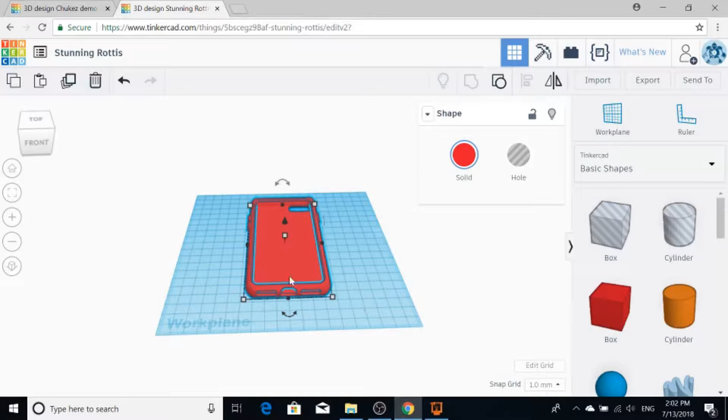All right, you guys, so here's the demo. This is the case that I designed on Tinkercad, as you can see. I wanted to go ahead and show you the logo, which I ended up using for my phone case.

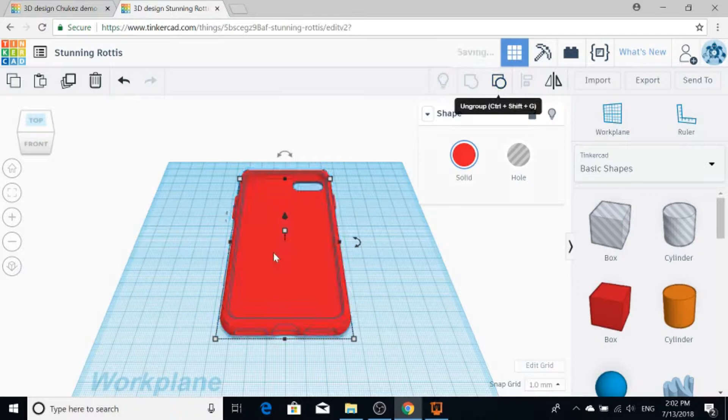Now, I'm going to kind of go through a little bit of how I designed it. Keep in mind, I did get the specs for the iPhone from the Apple website. I did have to make the cavity a little bit larger in order to fit the phone.

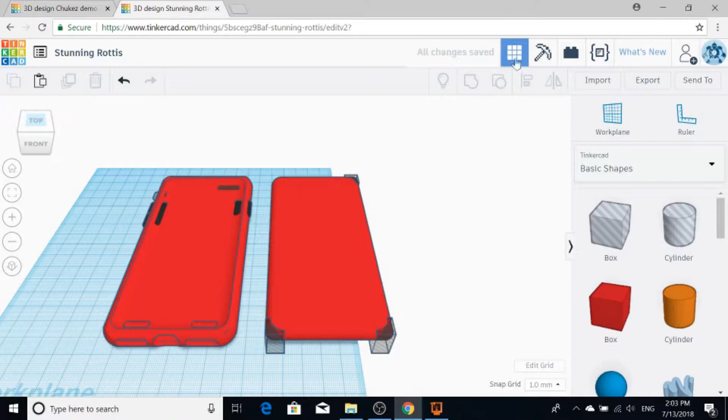And with Tinkercad, you're allowed to create a radius for your shapes, like the cube here that I'm using as the initial shape. But the radius was too sharp at the corners. So what I ended up having to do was create this here to create the proper radius.

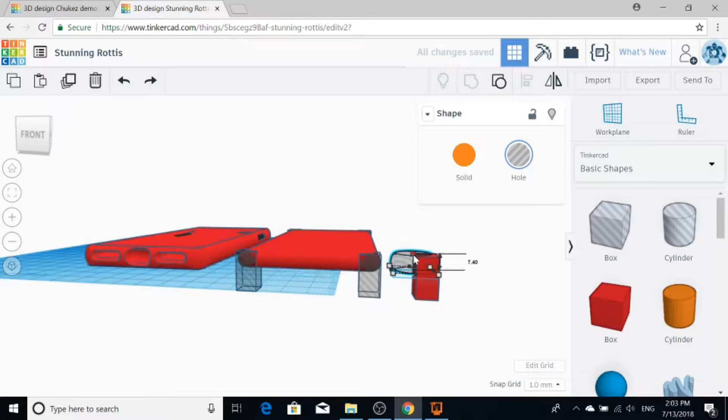So essentially, I took a cube, added a kind of a filled donut disc with the proper height here that'll actually allow me to fit the phone. And then took that as a negative out of the corner there, created, again, a hole negative, and placed those on each one of the four corners of the cube.

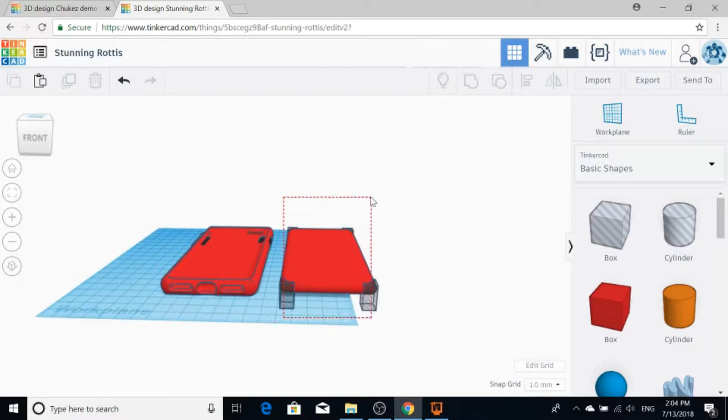Now, once I combined those five shapes, I went ahead and created the negative, centered that into essentially a bigger solid version of the same shape in order to get the shape of the phone case. As you can kind of see here, I'm kind of having to mess with it a little bit and make sure I get everything lined up properly.

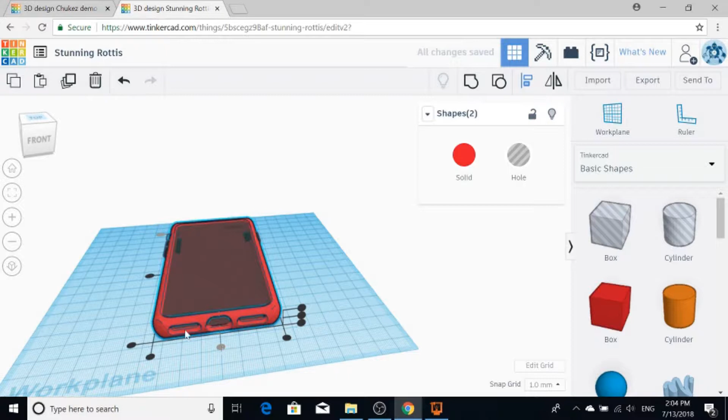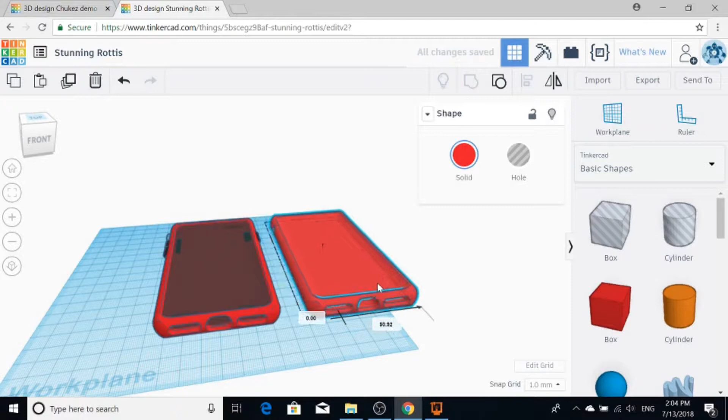So what I'm doing here is I'm just trying to show you essentially that I use the same shape. Now you can kind of see here on the top there, I used a different cube in order to create the hole in the case for the face of the phone to fit through.

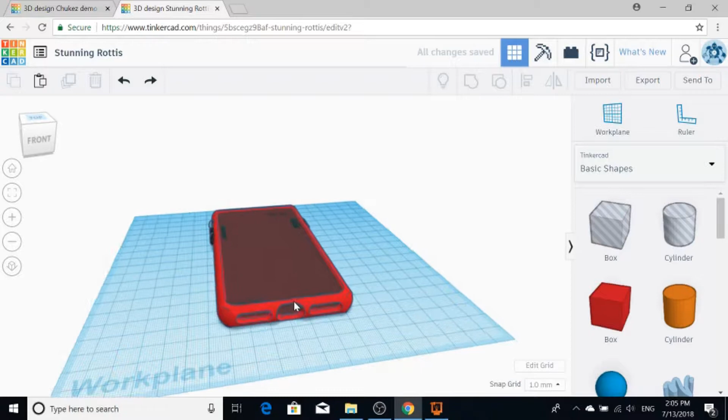Now what you'll see here is that I've got the holes lined up for the speakers on the left and right hand side here. In the center, that's the charging port, so I made that one a little bit larger and made sure it was going to fit.

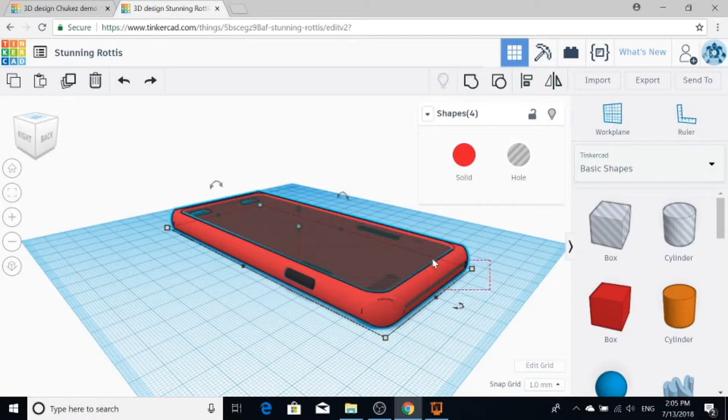Now, what I did in order to get all the buttons and holes lined up properly is I took the dimension sketch from the Apple website and took that into Adobe Illustrator, created an STL file that I was able to import, and then I kind of used that as a guide for where the buttons were going to be, where the charger hole was going to be, all of that kind of stuff.

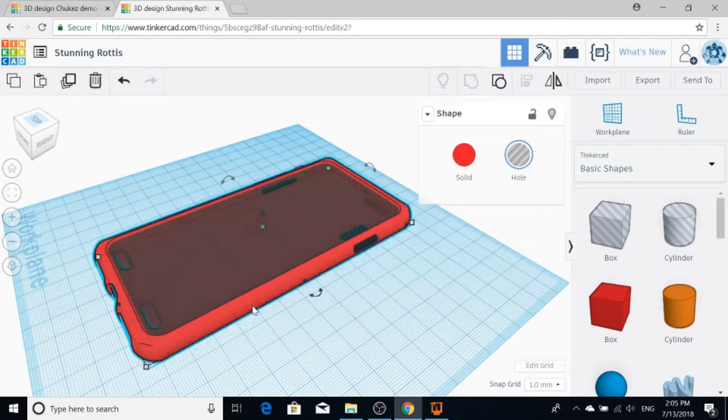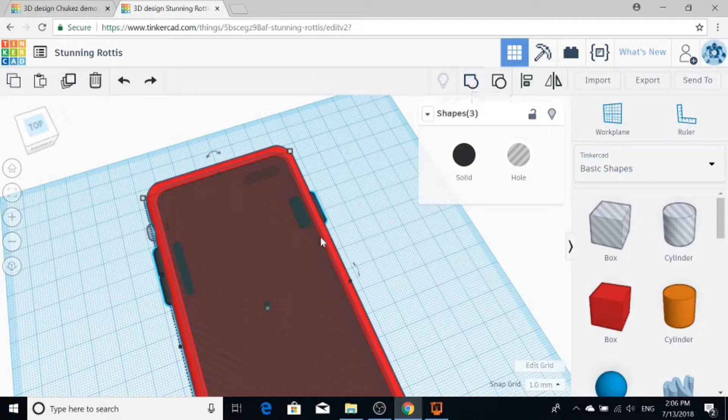Now, kind of what I'm trying to show here is how I grouped everything together. You can kind of see that these buttons that I added to the case are in the right spot, but in order to get them to function properly, what I had to do was group the negative space, the exterior phone case, and the buttons all together, right? Now I'm just keeping it red here just so that it's easier to decipher and everything kind of stays uniform.

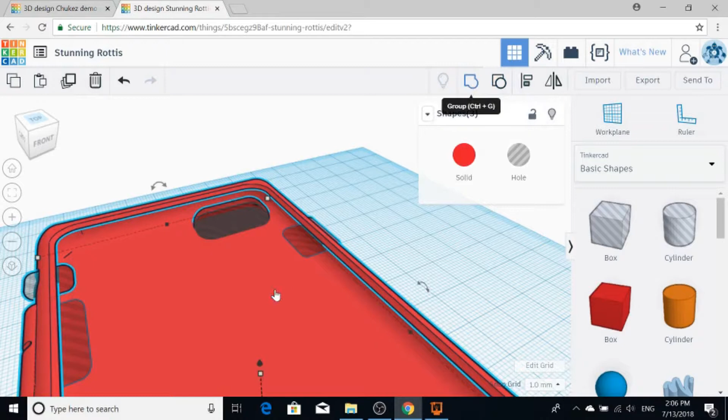Now, you can see here that I have these negative spaces for the camera hole as well as under the buttons here. All right, so what I'm trying to do is take this negative space. I'm going to go ahead and add in the camera hole here as well. But these two negative spaces and combine those with the exterior case. So that gives me a little bit of a gap so the buttons will fit properly.

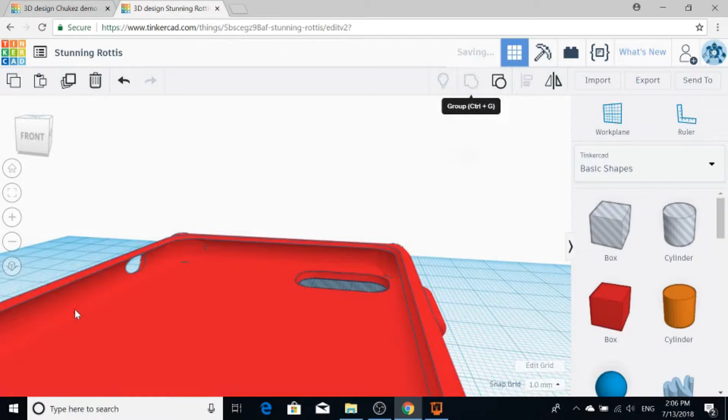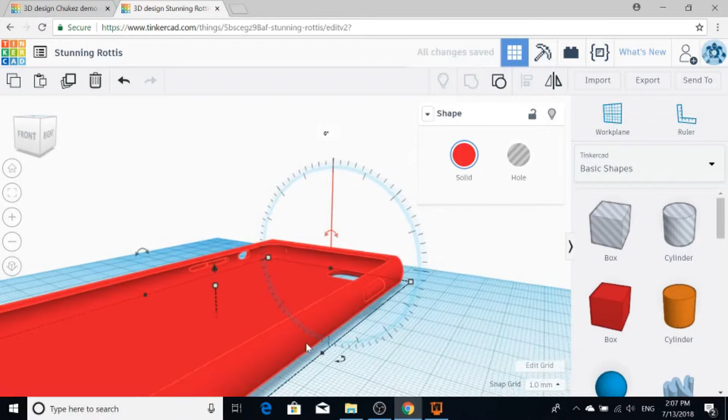Now, what you'll see here is within that, there's a small solid cube kind of shape that I used in order to be able to actually use the buttons so that it would function properly. So I went ahead and grouped everything together, right? At this point, I'm just adding the logo to it. And again, the logo is in negative.

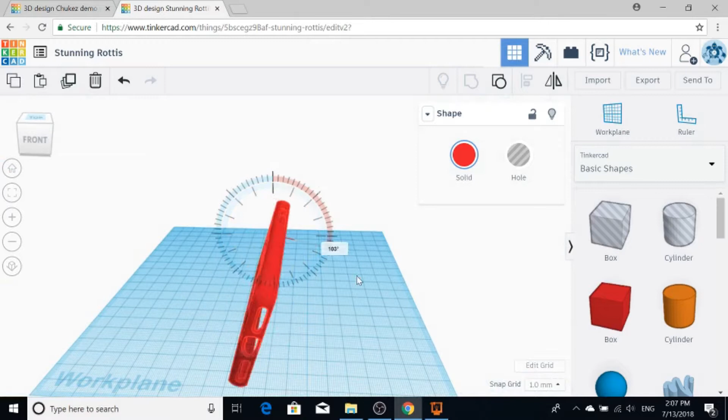I went ahead and added that to the bottom of the phone case, and you'll be able to see here that the phone case at this point is ready to print. Now, it did take me a couple of tries in order to get everything to fit properly, so I had a couple of test prints, but overall, this is what I found to be the best way to do that.

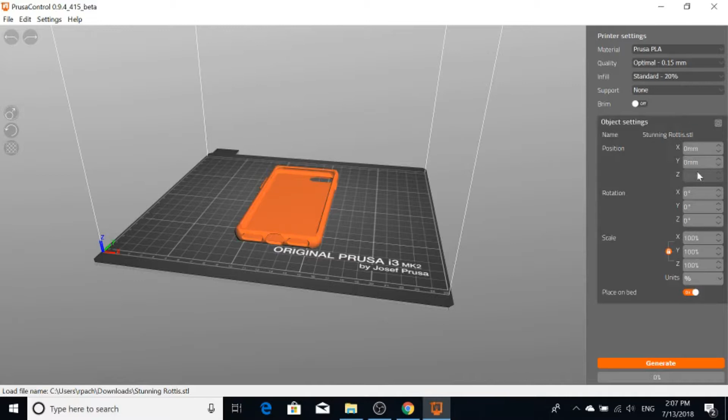Now, I exported the file into Prusa Control. Right, you can see here, import the file. Went ahead and selected the file, which is here, the Stunning Rottis. And then what I like to do is I like to keep it horizontal, so I orient it 90 degrees on the Z-axis.

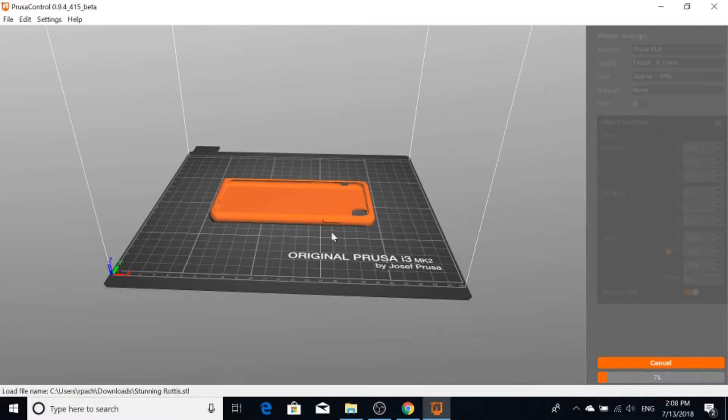Now, you choose your material, the quality, which is essentially the thickness of each layer, and the infill. And I do a 10% infill to give it a little bit of hollow space so it has a little bit of cushioning for the case, for the phone protection. Now, it does take a little bit of time to generate the file because it actually lays out what each layer is going to do.

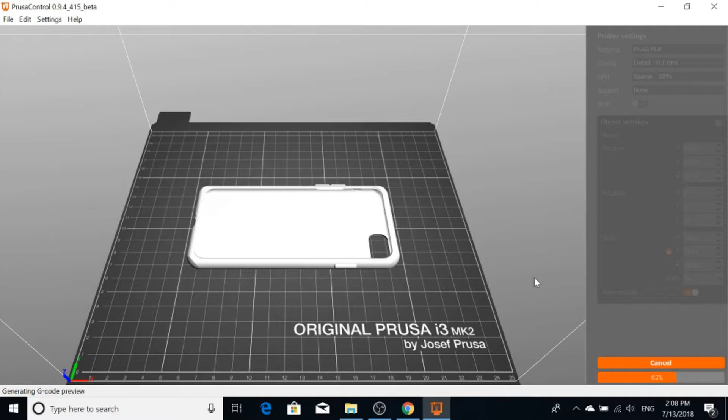But once it finishes here, I'm going to go ahead and show you how I added the layers so I could change materials and give myself the different colors for the case. So as you can see here, I'm going to go layer by layer so that you can kind of see how the program creates in order to print the phone case. So in total, this case itself is about 10 millimeters high.

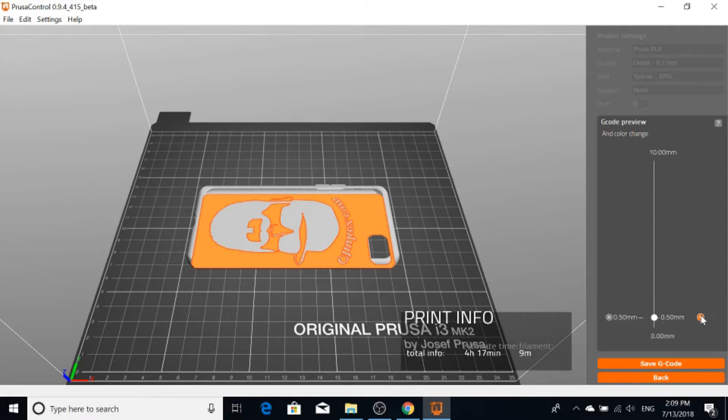All right. What I did was I allowed for, I believe it was 3 or 4 layers of the base color, which I do in a hard plastic. The hard plastic makes it a little bit easier to peel off of the bed because the rubberized material tends to get really sticky, and it tends to stick really badly. Then I added another few layers for the black, which I used for my logo. And then from there up, it's actually going to print in the rubberized material.

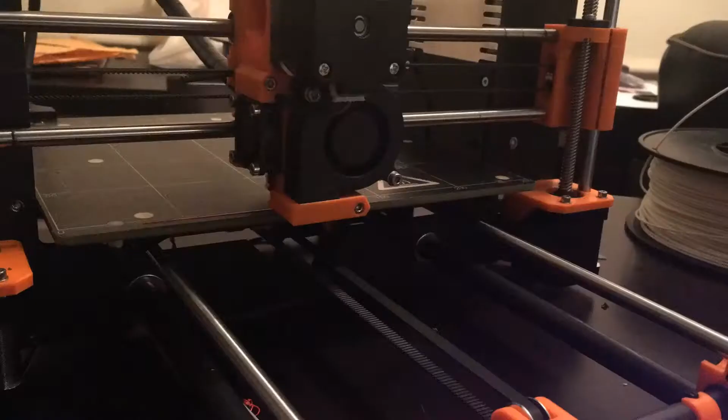So here's the time lapse of the print. You can see that I laid down the red first. It's actually a red PLA, then a black PLA, and then following that with a rubberized material in order to help with protection as well as grip and overall flexibility for the phone case.

Alright you guys, so I went ahead and finished up the phone case. Now, you may have noticed at the end of the time lapse there, it shows that there's quite a bit of stringiness. That happens a lot with this rubberized material. I'm using a TPE that I bought over at Micro Center, but it is a very common issue with any of these rubberized type materials.

Now, as you can see, the phone case came out pretty good. It did take a little bit of cleanup, but you can see that the logo's there, right? Website, that all came out pretty good, good detail, right? The holes all line up for the camera, for the flash. You can see the buttons on there, right? Space for the silence function, as well as the charger holes and speaker holes.

Now, the way that I cleaned up most of the phone case, I essentially pulled off a lot of the stringiness. It's really thin, so it breaks off fairly easily. And then for the little bits left over, I just used a lighter. I try to use a torch lighter because that works a little bit better to just burn those off. It tends to work pretty well. As you can see, there's not a whole lot of stringiness left in there. It kind of gets you a little bit more light.